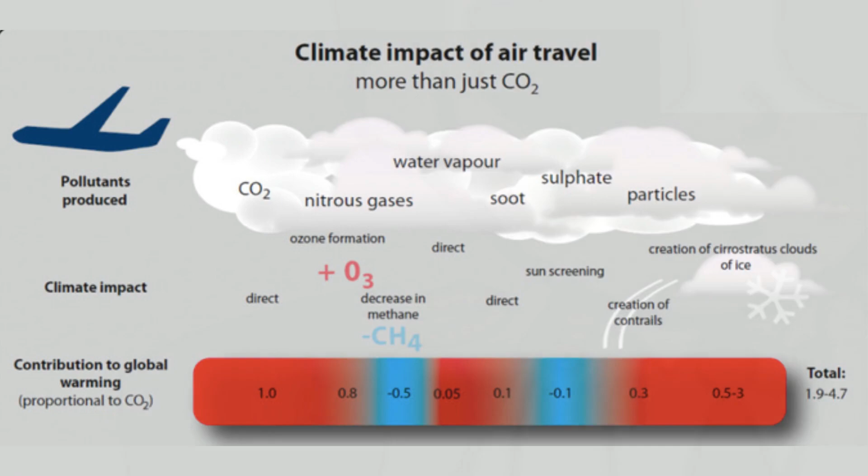The environmental impact of air travel is significant and it is growing rapidly. We all love to fly, but there is a downside.

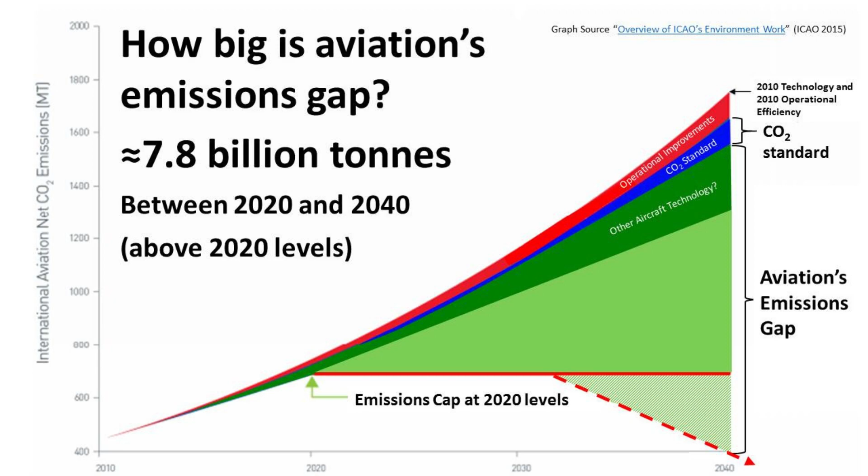Do you know that aviation is responsible for between 2 to 3% of all man-made global carbon emissions? Aviation could use up to 22% of the global carbon budget by 2050 if actions are not taken soon.

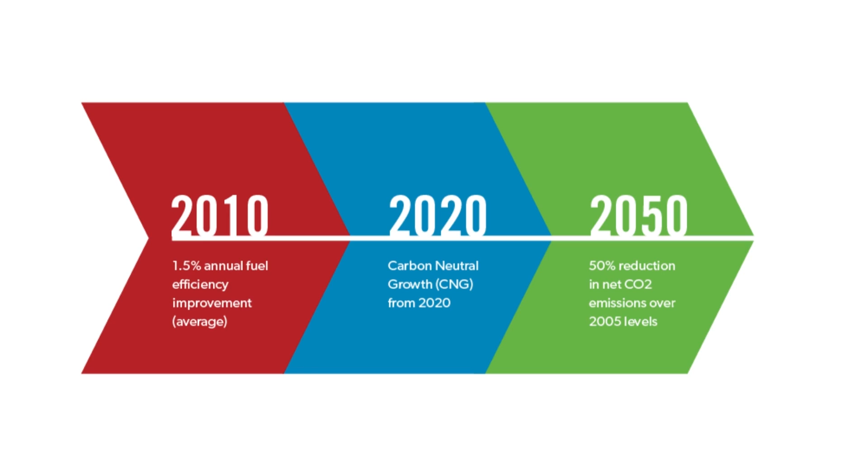The aviation industry has committed to carbon neutral growth by 2020 and a net aviation carbon emissions reduction of 50% below 2005 levels by 2050, to maintain growth while also addressing its environmental effect.

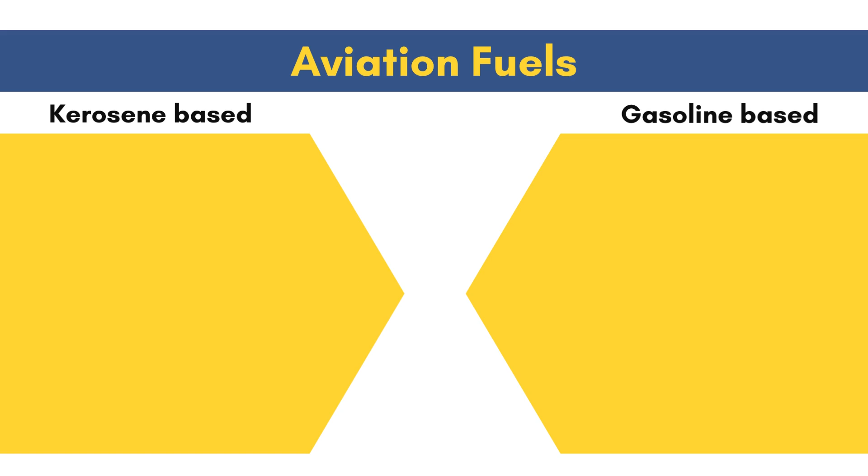Aviation fuels are petroleum based, or petroleum and synthetic fuel mixtures, used to power planes. They are kerosene-based fuels for gas turbine powered aircraft, whereas piston engine aircraft use gasoline. So the terms used in aviation are jet fuel and Avgas, abbreviated for aviation gasoline.

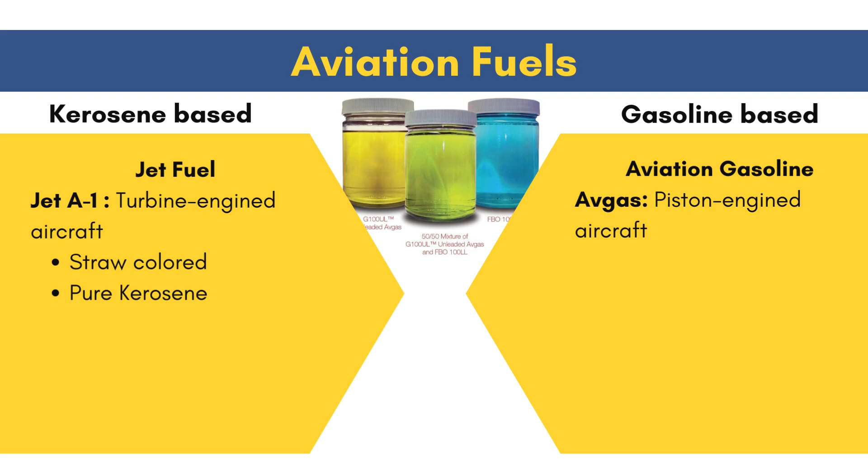Jet fuel is a straw-colored, pure kerosene-based fuel known as Jet A1. A second type also exists, known as Jet B, which is a blend of approximately 30% kerosene and 70% gasoline. It has a low freezing point and low flash point, and is primarily used by the military.

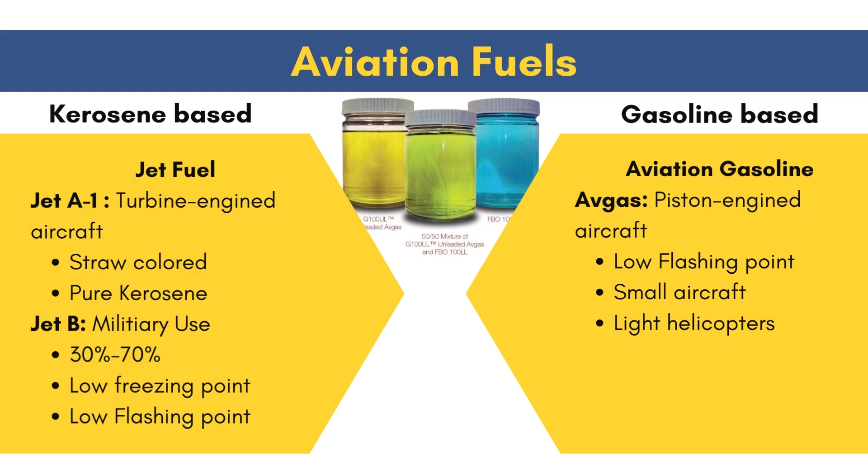Kerosene-based fuel has a much higher flash point than gasoline-based fuel, meaning it requires a significantly higher temperature to ignite. Aviation gasoline is used by small aircraft, light helicopters, and piston-engined aircraft.

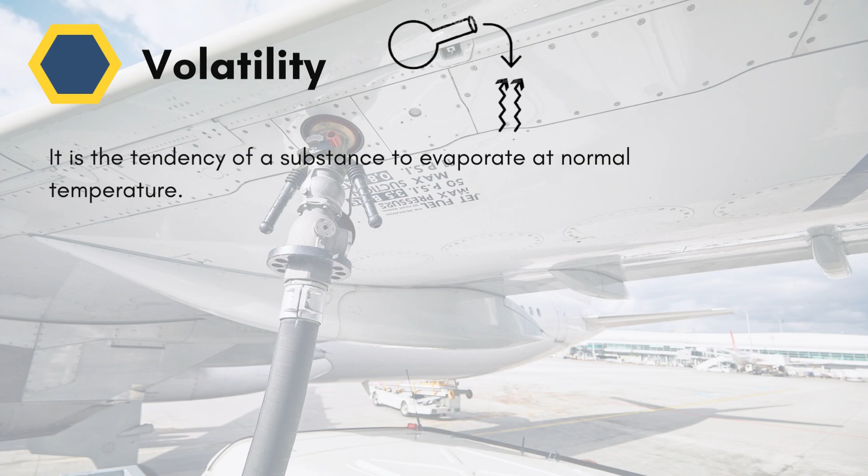Another property we need to take care of is volatility. It is defined as a substance which tends to evaporate at normal temperature, which means how easily a substance changes from liquid to vapor.

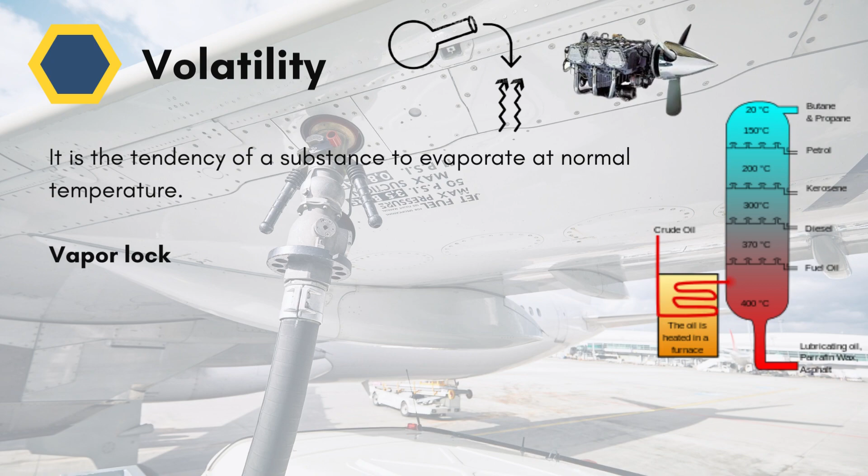Reciprocating engines require a highly volatile fuel. Liquid gasoline inducted into the fuel tanks must vaporize in the carburetor to burn, and at the same time the fuel must not be more volatile, because it can cause vapor lock.

A vapor lock is a condition when aviation gasoline vaporizes between the carburetor and the fuel tank, or in the fuel lines, due to heat. This usually occurs on hot days, and can also occur due to low pressure fuel or hot fuel in the fuel lines. One more property, specific energy—energy per unit mass—is an important criterion in selecting fuel for an aircraft.

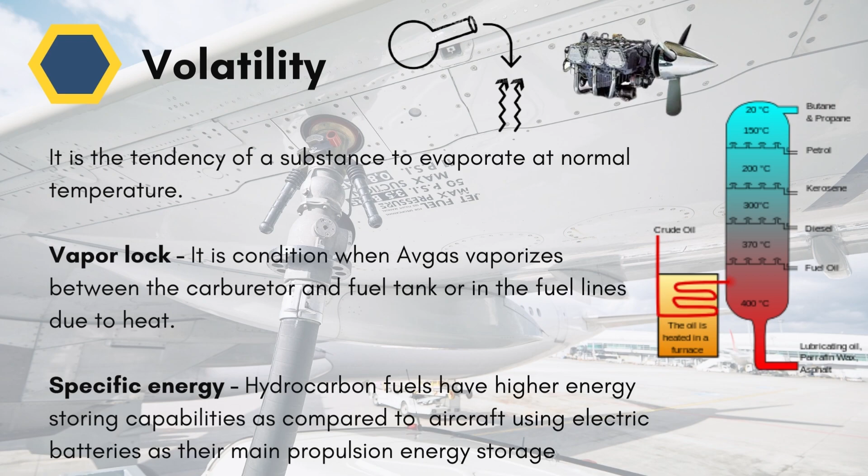Hydrocarbon fuels have much higher energy storage capacity compared to aircraft using electric batteries as their main propulsion energy storage. Now, aviation has moved into a renewable era with zero emission of carbon dioxide.

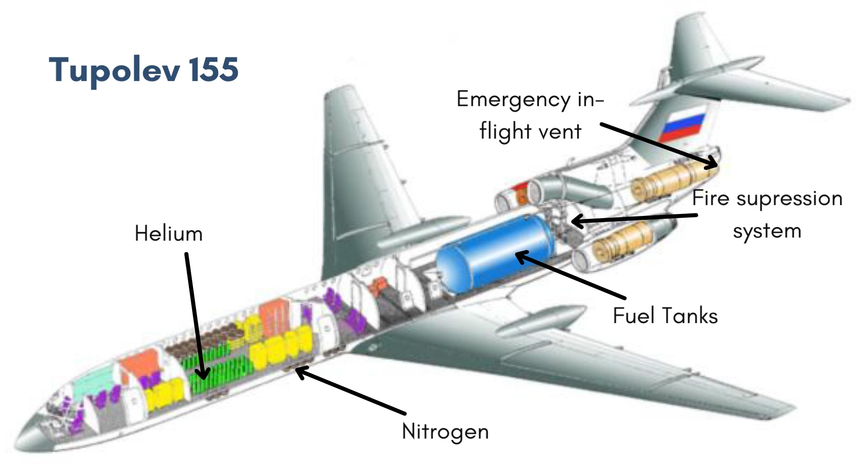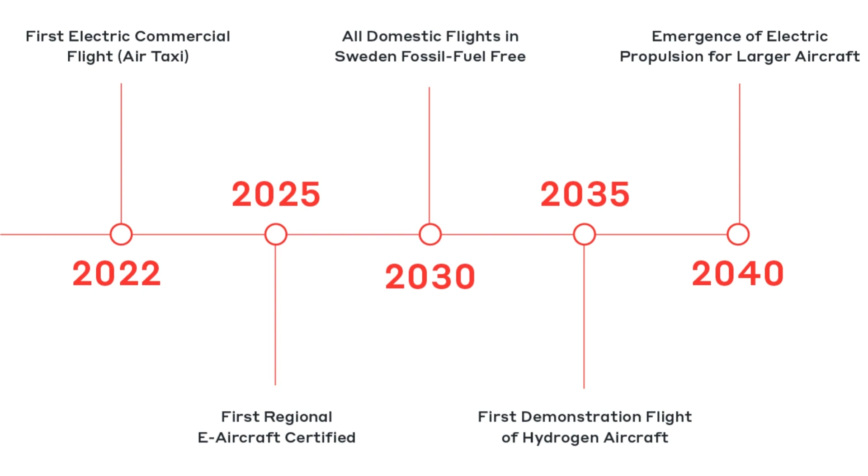But in future, blended wing bodies such as Airbus ZEROe aircraft designs might be able to accommodate this extra volume without greatly expanding the wetted area.

Therefore, an alternative to conventional aviation fuel is aviation biofuel, which is also termed sustainable aviation fuel. These are non-fossil-based aviation fuels made using biomass-to-liquid methods.

Sustainable aviation fuel has an advantage in that few or no modifications are necessary on the aircraft itself, subject to the fuel characteristics meeting specifications for lubricity and density. However, they are not being used heavily because they still face political, technological and economic barriers.

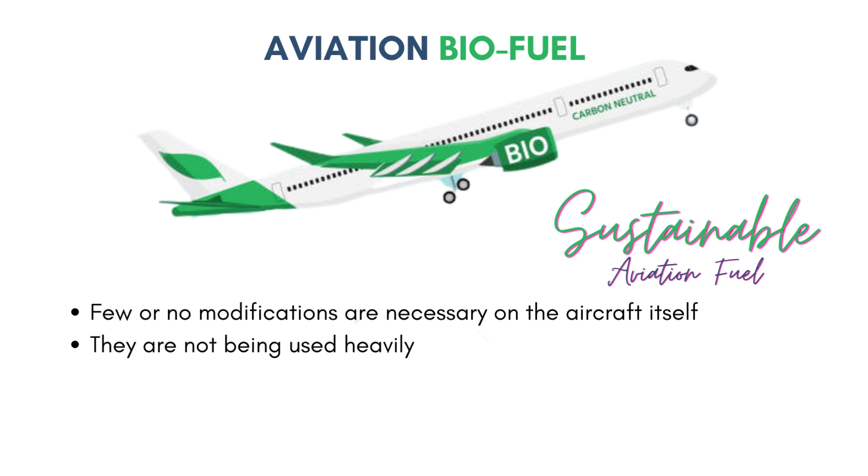According to studies by IATA, over 370,000 flights have taken to the skies using sustainable aviation fuel since 2016. It can reduce carbon emissions by up to 80% during its full life cycle. Moreover, more than 45 airlines now have experience with sustainable aviation fuel.

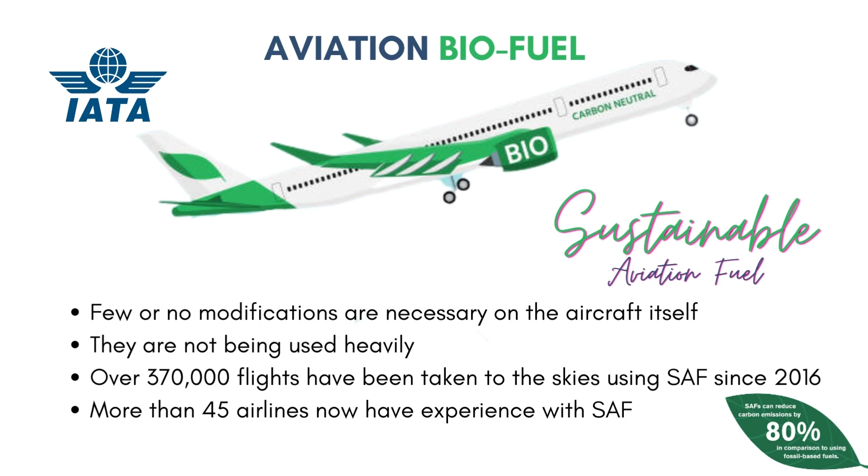The chemical and physical characteristics of sustainable aviation fuel are almost identical to those of conventional jet fuel, and they can be safely mixed with it to varying degrees.

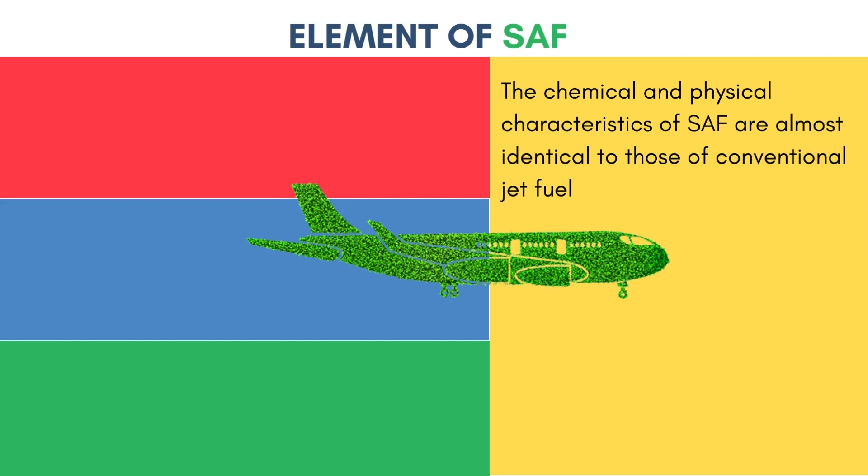A sustainable aviation fuel consists of three key elements: sustainability, raw material, and fuel. Sustainability is defined as something that can be continually and repeatedly resourced in a manner consistent with economic, social, and environmental aims, and conserves an ecological balance by avoiding depletion of natural resources.

Raw materials for sustainable aviation fuel vary from cooking oil, plant oils, municipal waste, waste gases, and agriculture residues. And lastly, fuel means jet fuel that meets the technical and certification requirements for use in commercial aircraft.

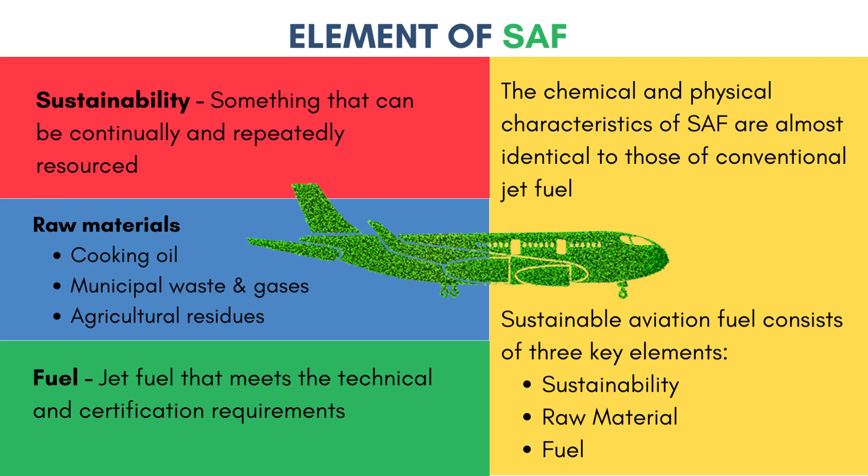So this was it for aviation fuel and sustainable aviation fuel. I hope that you enjoyed watching the video and gained some meaningful insights.